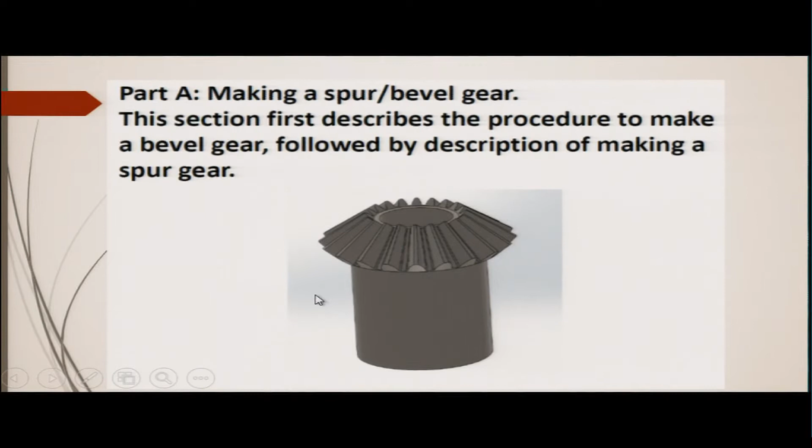This section first describes the procedure to make a bevel gear, followed by the description of making a spur gear. You can see the three dimensional or pictorial view of a bevel gear. This bevel gear has to be fabricated in the milling machine and the turning machine together. So let us see the steps.

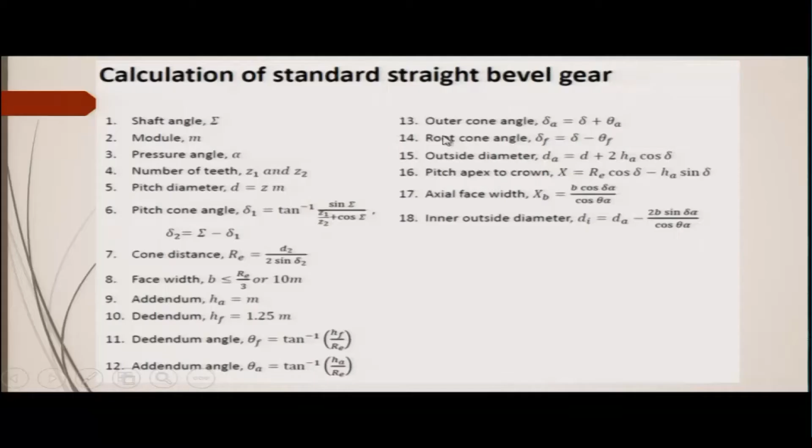Now let us see how, by knowing some parameters and calculating the remaining ones as I have shown, we can find out how this bevel gear can actually be manufactured.

Now, how to make that bevel gear? First step is to identify the raw material — the material out of which you are going to make the bevel gear. It may be a mild steel cylindrical piece, a steel piece, or any material that you desire.

Step 2 is to mount the cylindrical workpiece in the chuck. Since it is cylindrical, we normally mount it on a self-centering chuck, where the center of the workpiece is coaxial with the center of the spindle. It is a 3-jaw chuck, self-centering — if you rotate one jaw, the other jaws rotate as well. This will be shown in the lab.

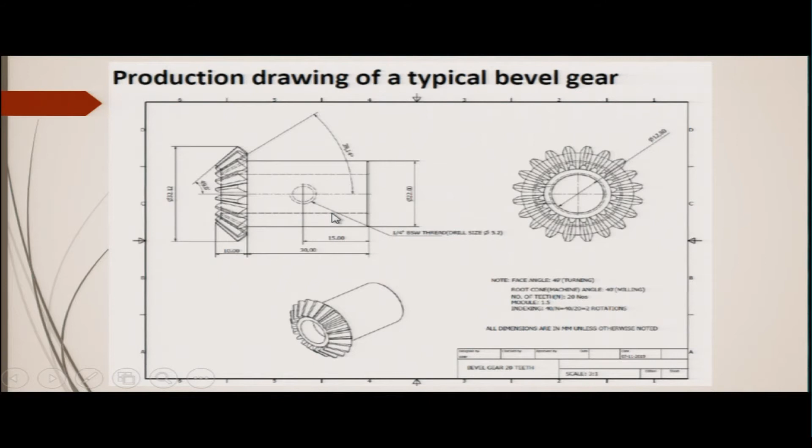Step 4 is drill a through hole, because we have a through hole here to hold this inside, shown in the dotted line. So drill a through hole.

The drilling hole can also be done in the turning lathe. For that you have the headstock where you mount the workpiece through a 3-jaw chuck. On the opposite side you have the tailstock where you mount the drill, which will not rotate like in a drilling machine but stays rigidly fixed. The tailstock can be moved towards the rotating job in the headstock, and the through hole can be made.

Step 5 is move to the milling machine, because this completes the operation in the turning. In the job you will have a section with the conical part, which is for cutting the bevel gear teeth, and this has also been made in the turning lathe.

After this, the milling process will start on that blank which has already been made in the turning lathe, to cut the bevel gear teeth. Mount the gear blank in the indexing head.

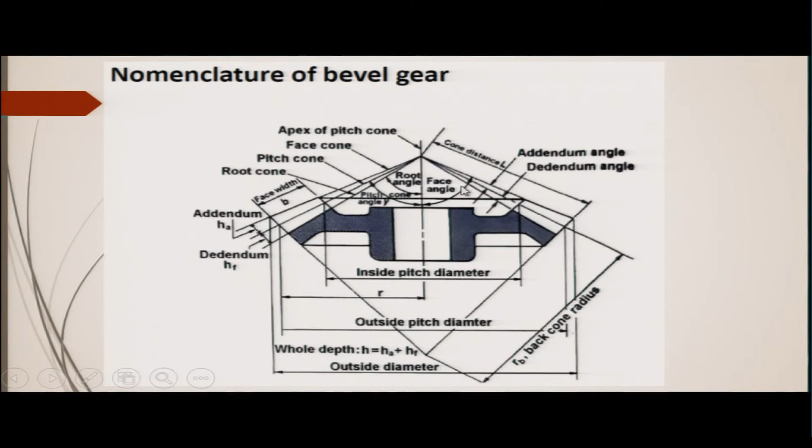How to select the cutter is standard. In the lab there is a rack with different kinds of milling cutters, and each milling cutter has a labeling showing that it can be used for cutting a certain range of teeth, say from 30 to 60 teeth. From 60 to 80 there is another cutter, for example. So in the rack there are many different cutters, and each is identified to make a particular number of teeth, depending on the profile.

Depending on the number of teeth you have a profile, and that profile conforms to a particular milling cutter. You have to select that cutter for cutting that particular number of teeth. This milling cutter will have a central hole.

At the center, along with the hole, it will have a keyhole. Using that keyhole and the center hole, the milling cutter is mounted on the arbor of the horizontal milling machine. This attachment will be shown in the lab, demonstrating how the milling cutter is mounted on the arbor.

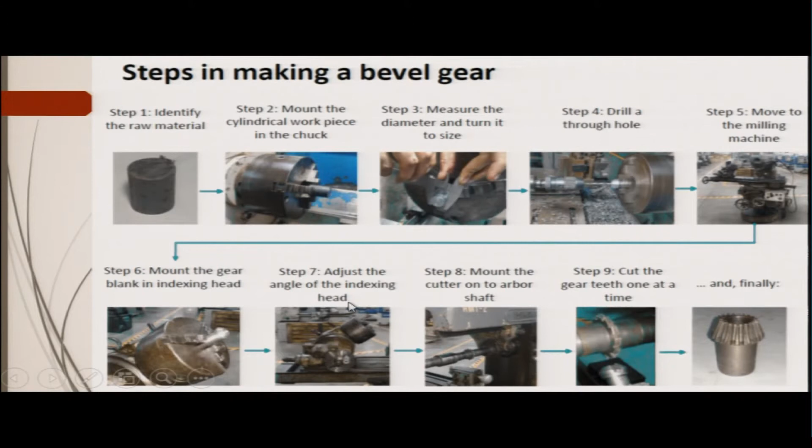Okay, so these steps in detail can be seen here. Select a lathe machine. Here are the details of the lathe machine.

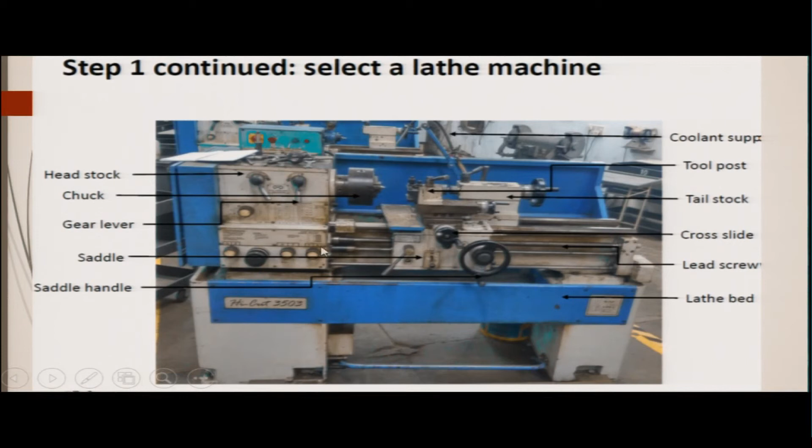Then the conical head has to be made, so that the gear can be cut, because right now it is a turning lathe operation going on, but ultimately we have to cut the bevel gear, and the bevel gear will be cut on the milling machine.

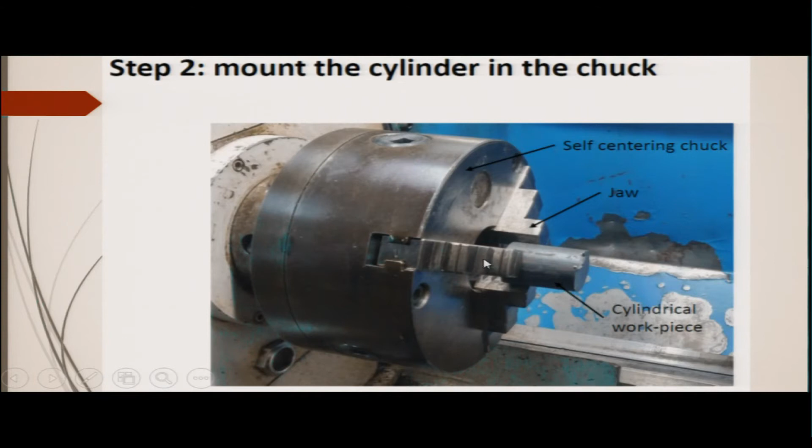This is important because otherwise, if you are machining without having the two axes coaxial, the machining will not be appropriate. It will be either tapered or out of roundness, depending on the amount of coaxiality or non-axiality.

So measure the diameter and turn it to size with a vernier caliper, because it will actually give you more precision of measurement. So here, what are the processes being done - it is given here.

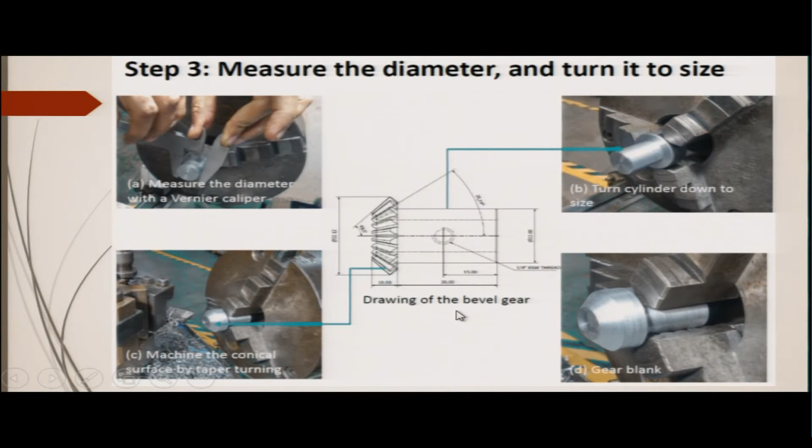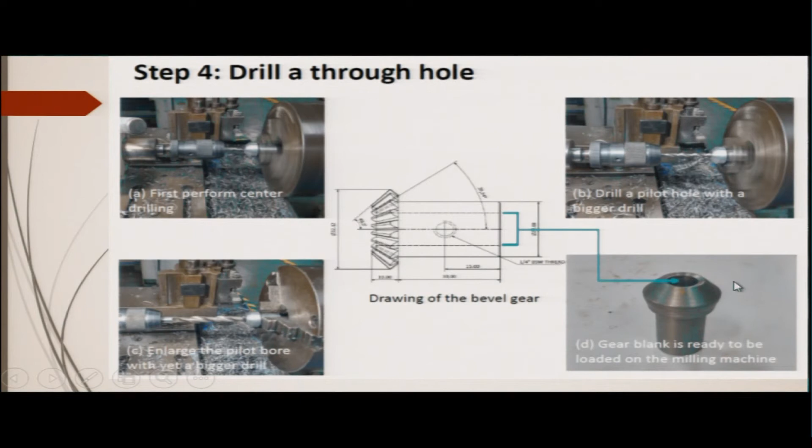The pilot bore or pilot hole has been made with a drill diameter less than what is required for the internal hole. So here you will take a diameter of the same size, so the final hole can be made. The diameter here is less than required, then the final diameter of the drill is selected, and the hole is drilled. The gear blank is now ready to be loaded in the milling machine.

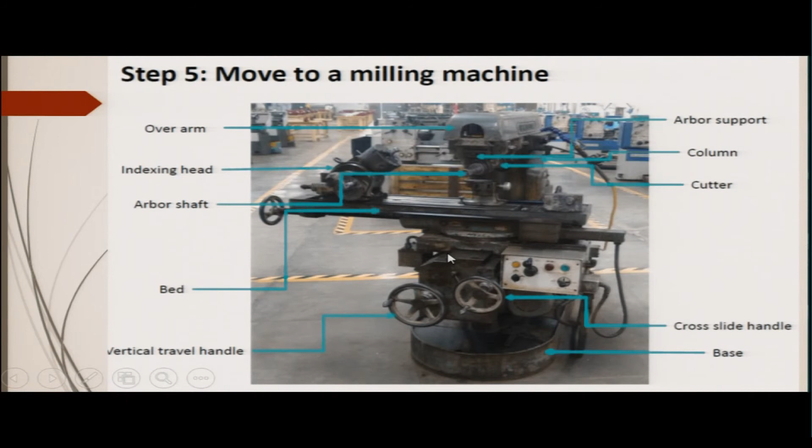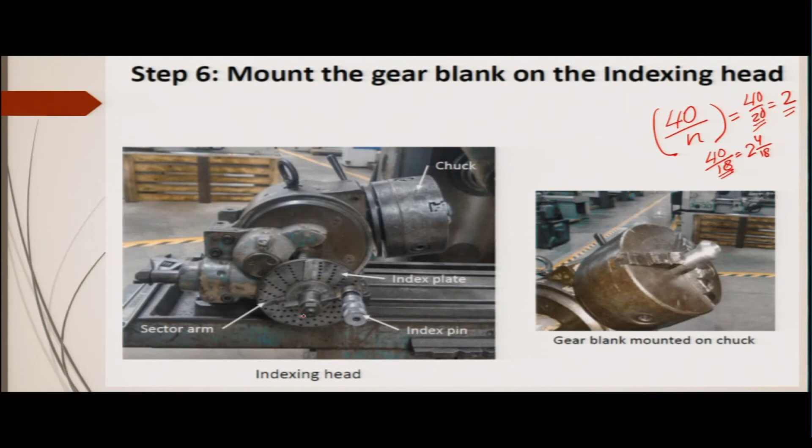Suppose you have to cut 18 teeth. It will be 40 by 18, which is 2 complete rotations plus 4 by 18. So this is 2 complete rotations and then 4 holes out of 18 holes. That is how we actually make it. For cutting 18 teeth, the formula is 40 by n, so 40 by 18 gives 2 complete rotations and 4 by 18 remaining. Meaning that if we have an indexing plate where the peripheral number of holes is 18, after moving 2 complete rotations, you move 4 of the smaller holes, 1, 2, 3, 4, where it will be 18 holes total in the periphery. That is how the calculation is made.

It is simple, and you can quickly make a calculation, that is 40 by n, for how many times the indexing plate has to be rotated and how many fraction of rotation has to be given. So that will be the indexing for the teeth, for moving from one position to another position of the teeth.

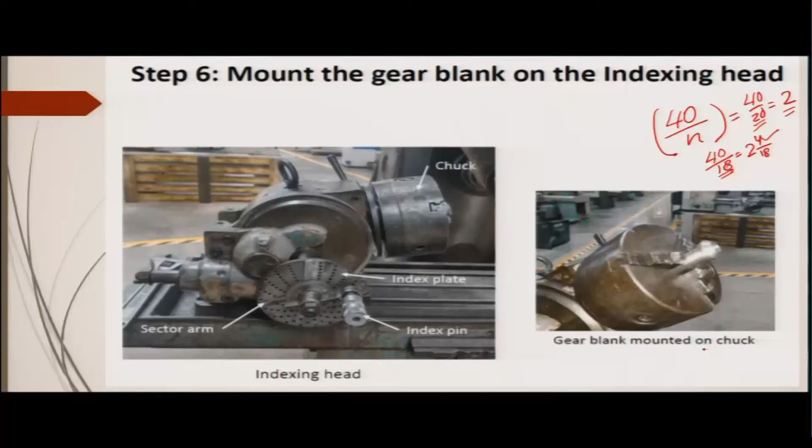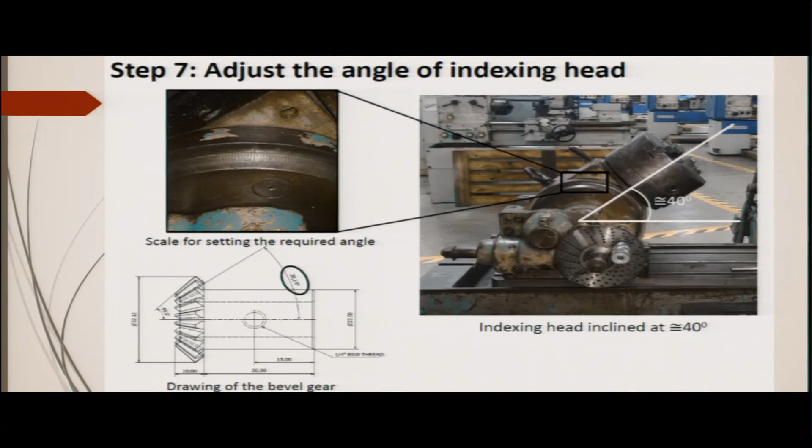Let us say it is about 40 degrees. We have calculated, I think it was 39 point something, so about 40 degrees. The next steps involve this arbor shaft. From the arbor shaft you have to remove the support and remove all the spacers, so that the cutter can be mounted.

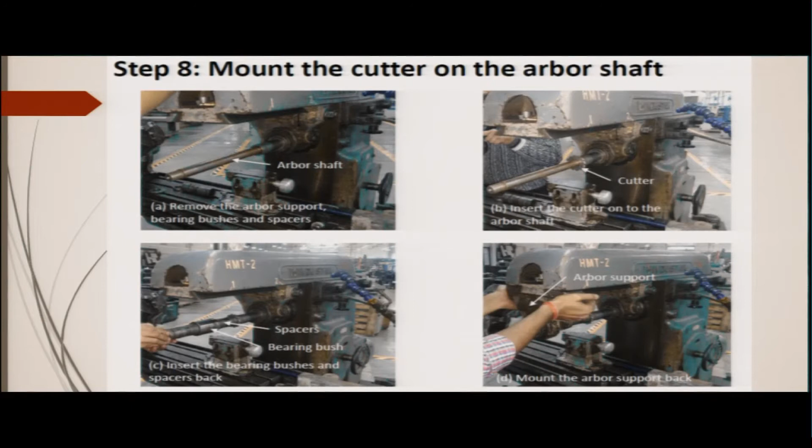Normally after the milling operation the cutter is removed. So to remove the cutter you have to remove the spacers and the support, then you put another gear, another cutter, and those spacers and supports have to be mounted back. Then index and cut all teeth similarly.

So all the other teeth are cut similarly after indexing using the indexing head. Once again you have to rotate the indexing head through a complete circle depending on the number of teeth you are cutting. Suppose you are cutting more than 40 teeth, say 60 teeth. The same formula can be used, 40 by 60, which simplifies to 4 by 6, or 12 by 18.

So that means when there are 18 holes on the periphery, out of those only 12 holes you rotate—not a complete rotation, but up to 12 holes. That is how you can cut any number of teeth that is required.

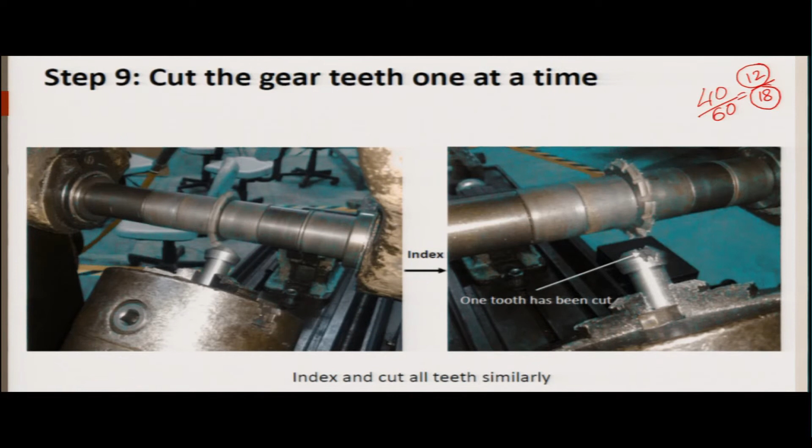So here you have the bevel gear that has actually been cut. Now while doing so, you must have used these kinds of tools: the cylindrical blank, the drill with 12.5 millimeter, the drill with 8 millimeter. If you remember, we had a pilot hole and then a final hole. So these are the pilot drills used for making the final drilling, the center drill for marking, and this is required for the actual drill—the pilot drill and the actual drill to go properly. All the time you need a vernier caliper to measure the diameter.

This is the gear cutter that has been used. This is the single point cutting tool used for making the turning and the conical shape of the blank in the turning lathe. Spanners are required to tighten and loosen the screw, and this is the drill chuck in which these drills are mounted.

You can see these drills are of lesser diameter, up to 12.5 millimeter. These drills are not required to transmit so much torque for drilling the hole. So therefore, as I told you earlier, the torque carrying capacity of these kinds of drills with a lesser diameter is less, and therefore the shank is made as a cylinder.

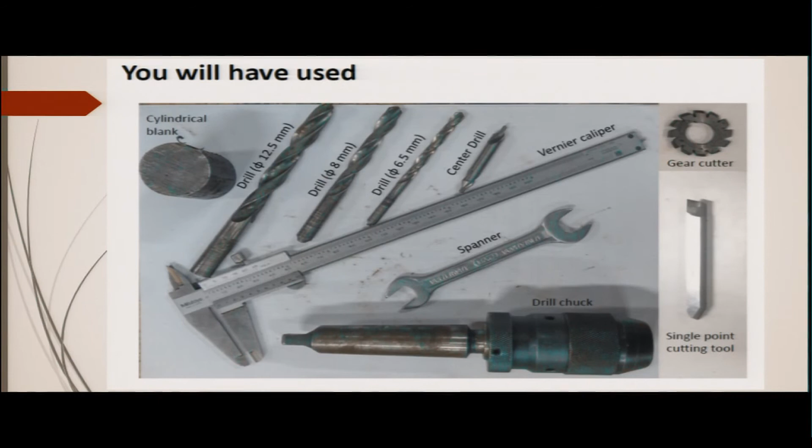Now these are the steps of a bevel gear, once again repeated. I am not going to show you all of them one by one again, because this would be repetition.

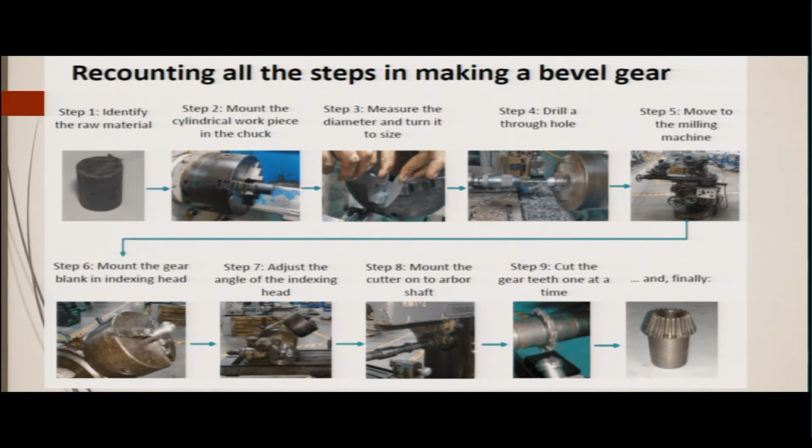Now for the spur gear, here is the pictorial view of a spur gear. This is the drawing, like we made the drawing of the bevel gear. Here the complete engineering drawing of the spur gear has to be made with all the dimensions, and these are the parameters. In the parameters you have to write the number of teeth in the drawing itself—the module we have given, outer diameter, depth of cut, internal diameter, tap hole, and the indexing, meaning how many rotations you have to make.

So that indexing will be made depending on the number of teeth. Here probably 20 teeth has been selected, so 2 rotations are made for the indexing. The raw material you have to write—here it is written as mild steel, and the diameter given is the blank diameter. So before you cut this, you need to have the blank, and the blank diameter is given here in the drawing.

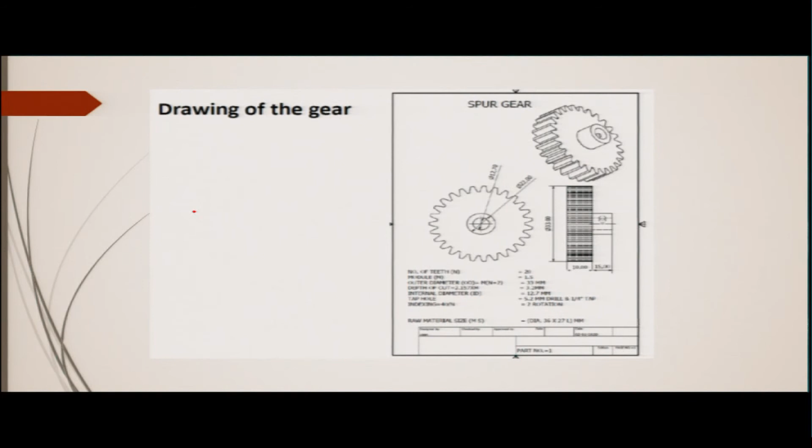So the steps are the following: identify the raw material, like we showed in the steps for the bevel gear. Mount the cylinder in the lathe, measure the diameter and turn it to size, drill a through hole—just like in cutting the bevel gear. Assemble the gear blank on a mandrel, mount the mandrel in the machine, and turn the gear blank down to size.

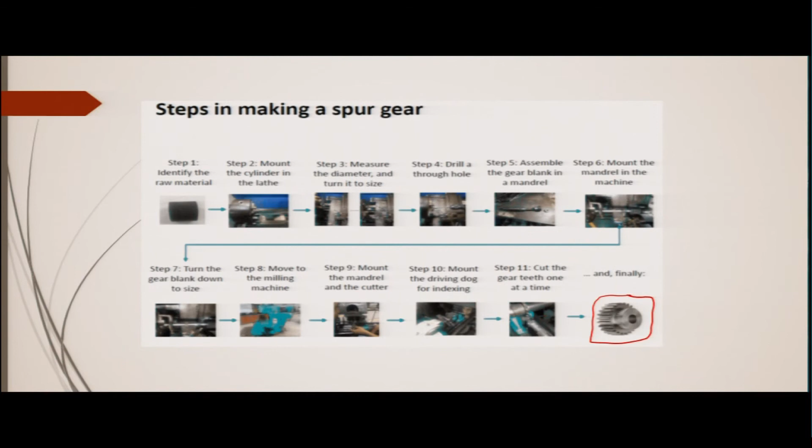Move to the milling machine, mount the mandrel and the cutter—these are the same steps, which I will show you in detail one by one. Mount the driving dog for the indexing; this is something new for making the cylindrical part. Cut the gear teeth one at a time. The procedure is almost the same as in the case of the bevel gear, only here it is straight teeth you are talking about, and what you finally get is the spur gear ready for use. These are the steps, and the raw material has been identified.

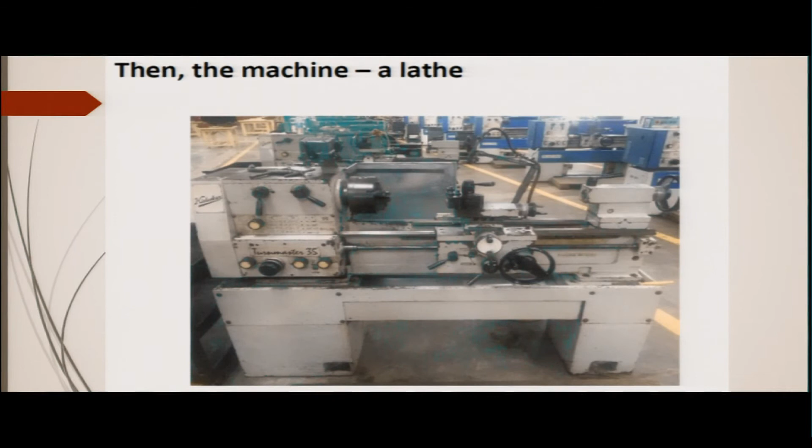This is a cylindrical job, in this case a cylinder. This is the lathe machine on which it will be mounted. I am not going into details since I have already described how this can be mounted on the lathe and the description of the lathe. The same lathe can be used for this, because what we are doing is turning, turning the outer surface, facing, so that the blank can be made for cutting the gear.

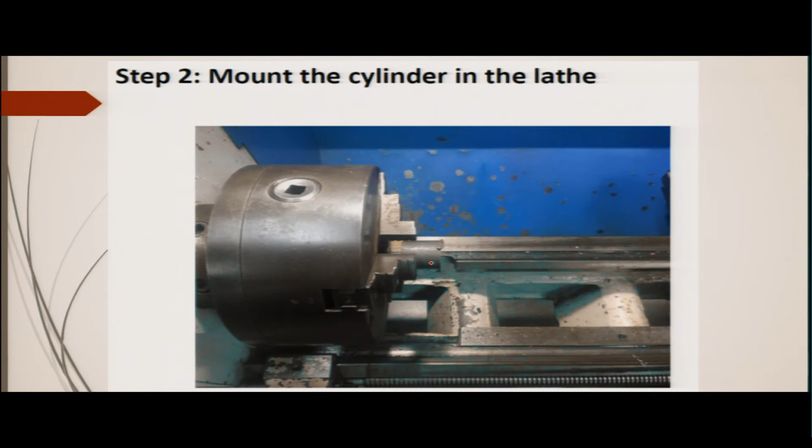You can see here this is mounted on the 3-jaw chuck, this is the cylinder, this is the blank. Here is the cutting tool, mounted on the tool post with the tool holder.

Measure the diameter with the vernier caliper and then turn it according to the diameter required. While doing so, you finally have to measure again with the vernier to check whether proper turning has been done.

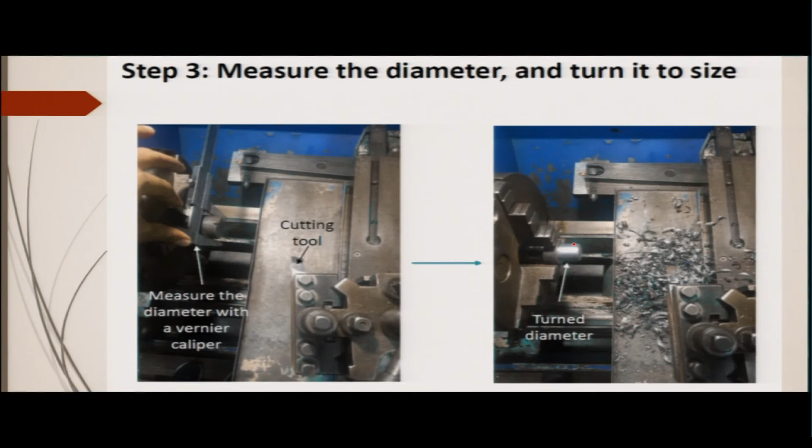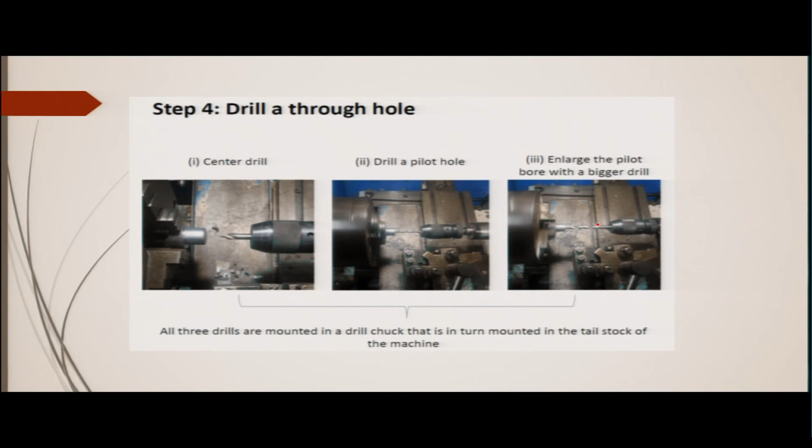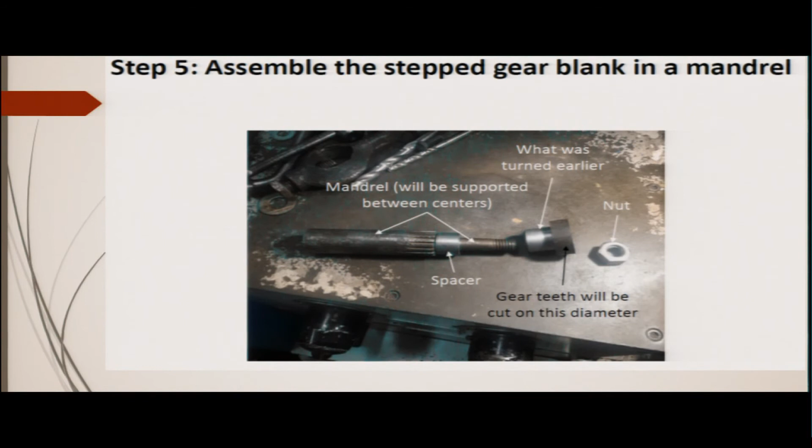The gear blank is very small in length, so that length cannot be fully supported between the centers, it is not convenient. Therefore, it is mounted on the mandrel, and the entire mandrel is then mounted on the centers between the headstock and the tailstock.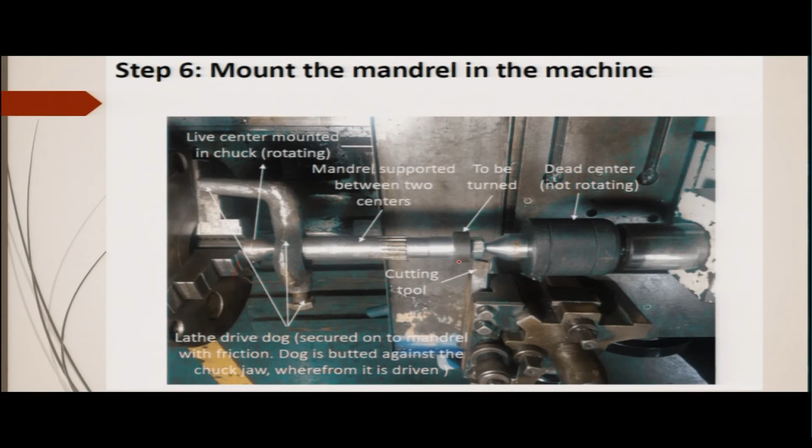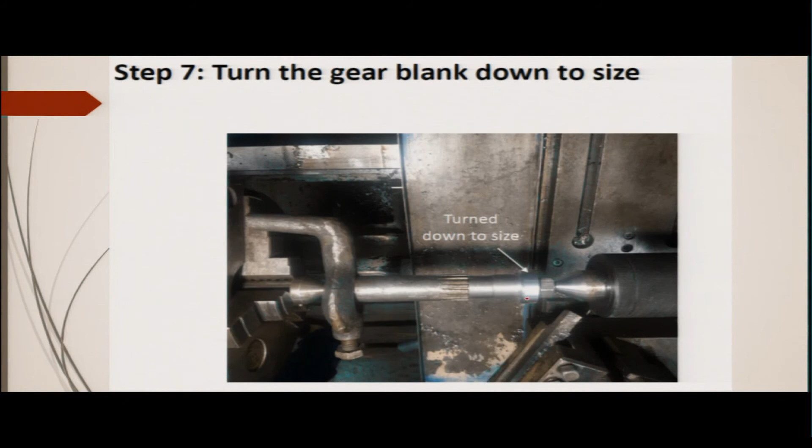This is now turned to size, meaning according to the diameter given, and this face is according to the length given in the drawing.

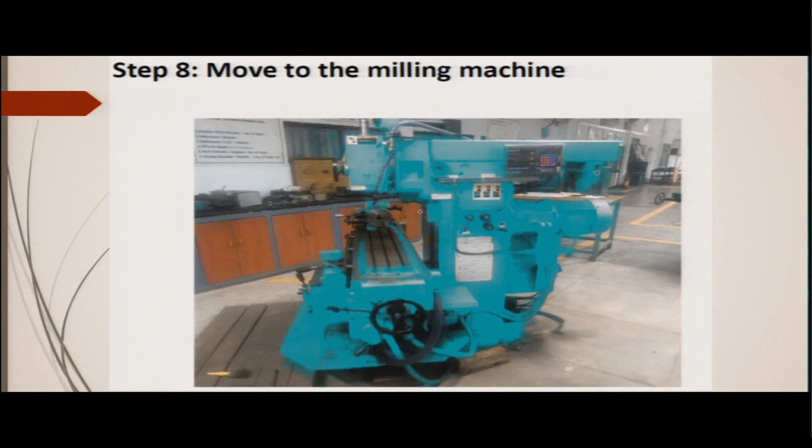Now we move to the milling machine where the gear teeth will be cut. You can see the process will be more or less the same. Mount the mandrel in the milling machine between centers, and mount the form cutter for cutting gear teeth.

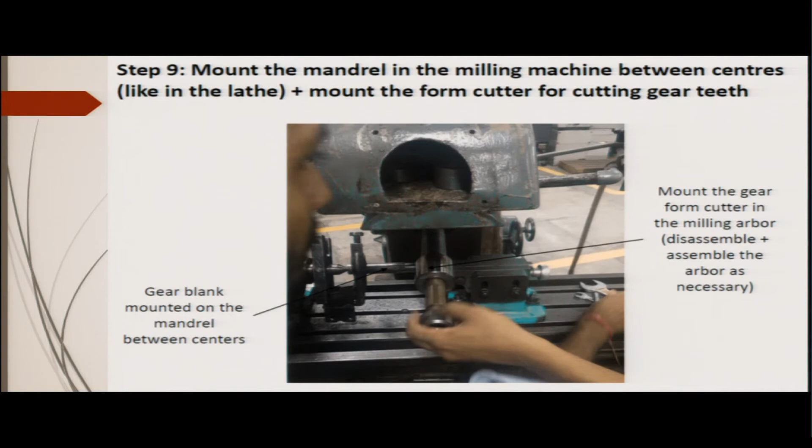Here the milling cutter used will be a form cutter. The driving dog for indexing is mounted here. This is the gear blank, and this is the milling cutter mounted on the arbor, like shown in the case of bevel gear cutting.

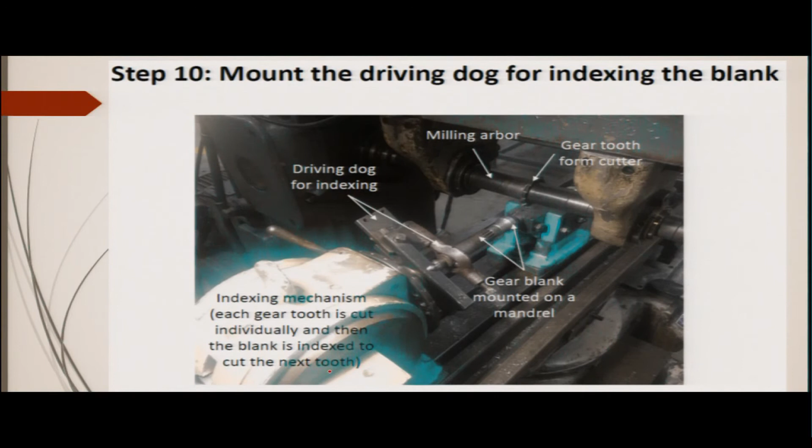Indexing mechanism: each gear tooth is cut individually and then the blank is indexed to cut the next tooth. As explained, in the drawing there should be 2 complete rotations of the indexing head or plate. That means we must use 20 teeth. If we cut 20 teeth, then 40 by 20 equals 2, which is the 2 complete rotations of the indexing plate.

This is how one tooth has been cut, using the form milling cutter. This is the workpiece, and here you can see the tooth is cut. Similarly, the other teeth can be cut using the same form milling cutter, but in each case it has to be turned to the angle or the number of turns of the indexing plate as calculated.

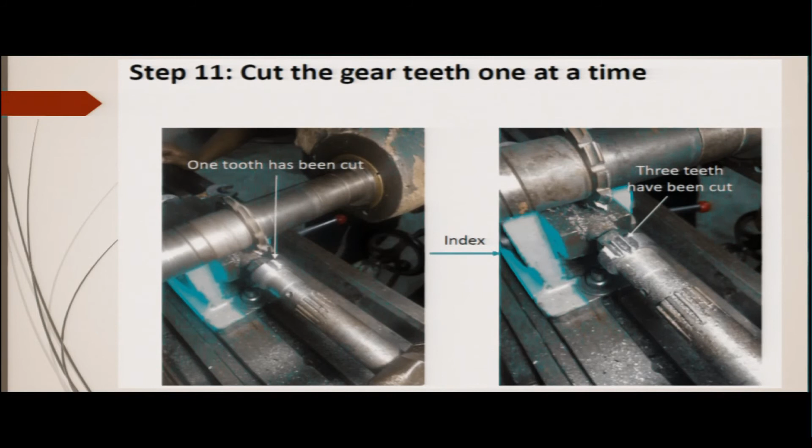Okay, and then the spur gear is ready. It is like the previous one as I showed it to you. So these are the tools that you must have used.

Again, the drill chuck for making the center drill, the pilot hole and the subsequent enlarging of the pilot hole, and the cutting tool. Lathe dog is something new, because when the workpiece is mounted on the centers between the two heads, headstock and tailstock, we have to have this kind of mechanism, the lathe dog, to transmit the rotation from the spindle to the mandrel or to the workpiece.

This is the mandrel in this case. This is the dead center which does not rotate, which is mounted at the tailstock. This is also a Morse taper. This is the live center, which is like the dead center, but it is mounted normally in the headstock, and this rotates. That is the difference between the live center and the dead center.

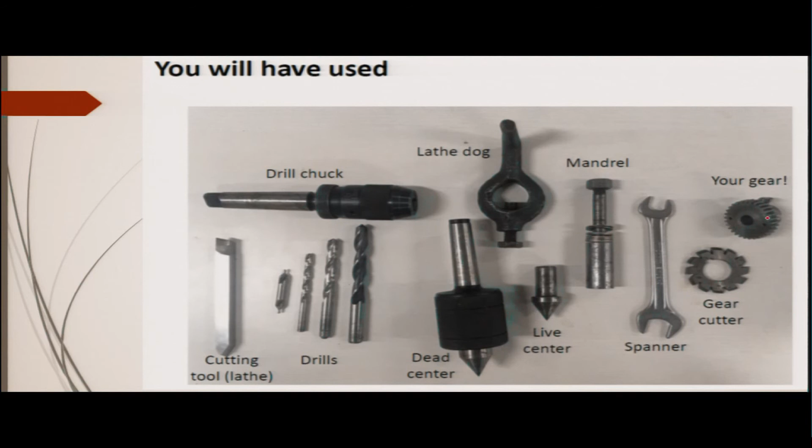Spanner used, gear cutter, which is used for cutting the gear, and your gear which you are cutting is here. These are the steps for making the spur gear.

I have shown you some slides on the tools which are used, on the measuring tools that are used in the lab, and you will all, as I said, see them.

Now, after that I have told you in detail about the technological process of manufacturing and fabricating spur gear as well as bevel gear.

I also told you that in the lab you will see there are conventional machines as well as CNC and NC machines, on which we give hands-on training to the students, to our undergraduate students, irrespective of their discipline. All students go through such kind of training, and on the CNC and NC machines we particularly teach them how to make a part program, so that they could be equipped with making a program for any kind of part that they encounter in practice.

Similarly, I would also like to expose, through these discussions, all of you to part programming in the CNC and NC machines, which you will find rather easier than it is thought of.

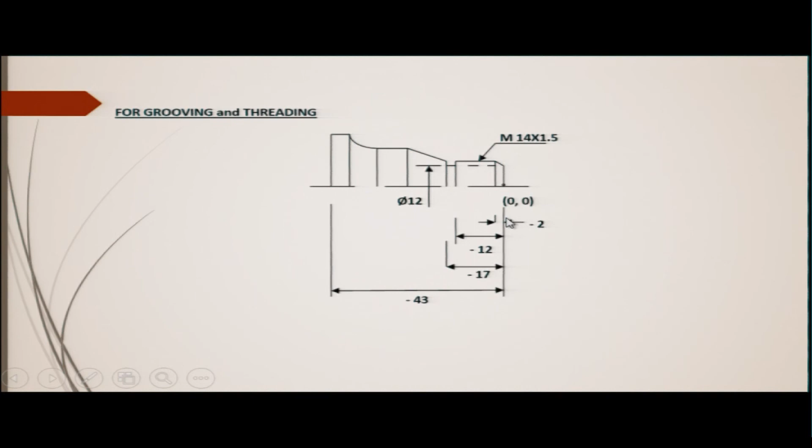This is the chamfer where this distance is 2 millimeter, and normally the chamfer angle is about 45 degree. So this is to be mentioned, but here it is not. Now this diameter is 20 millimeter.

You understand that here only half of the part is shown, assuming that this is a symmetric part. So the other half will be symmetrical to this, or the mirror image of this portion.

Going ahead, I should tell you that in case of turning, CNC turning, this is the system of axis. X axis is here and Z axis is here. Out of that, on the top it is plus for the X, and below the origin it is minus, this is negative. And along this length, that is the feed direction, along this it is the Z axis.

All the dimensions will have a negative sign if they are lying to the left of this, and all of them will be having the plus sign when they are lying at the right side of this. All right, now this is the origin.

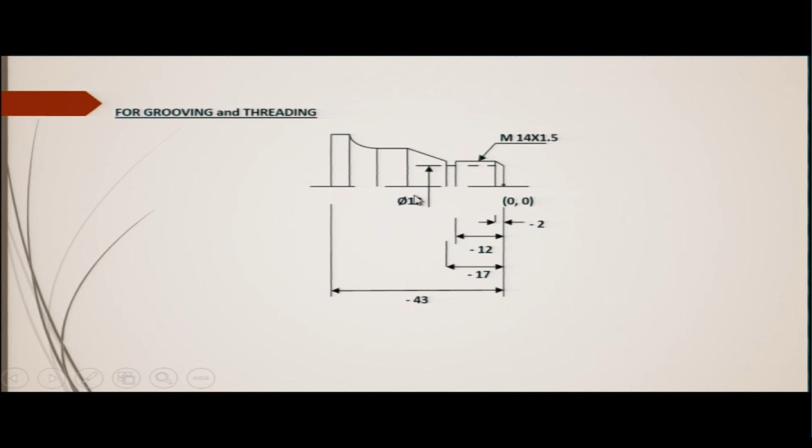For this we select a blank. This blank we have taken as 70 millimeter into 29 millimeter. Although if you see that we need only 43 millimeter, so the remaining we have to remove, and in the diameter we have taken the diameter of 29 and we have to get only the 24.

So this is taken because we have to have some kind of an allowance, so that the hard layers or the stock which is at the top of this blank, which I have shown you earlier, that there is a stock at the top of the part blank, and that actually is an oxide of the material which is very hard, and the hardness of that layer is more than the hardness inside the layer. So therefore that layer is normally removed, and therefore along the diameter and along the length some allowance is taken.

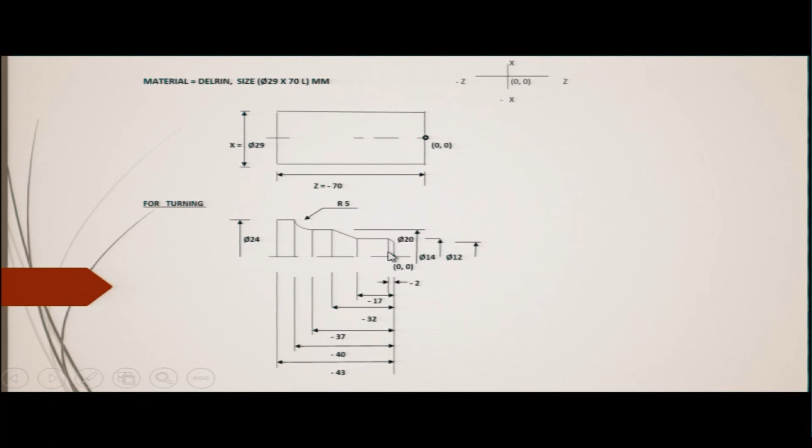And for 43 millimeter we have taken 70. Well, if you ask me why not 60, I would say okay, you could have taken 60 as well. That depends on what kind of blank quality that you are having, but it should be more than 43. So that allowance that you will be having should be added to the final dimension of the readily made part. Thank you for your attention.